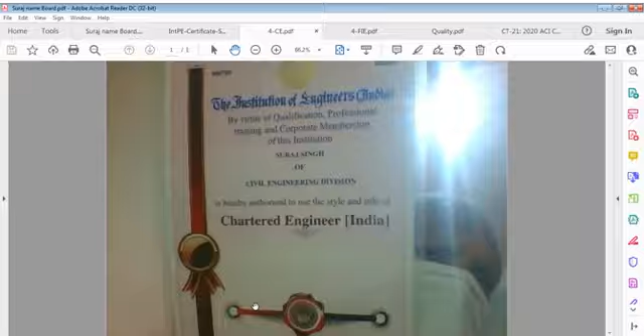in 1935 by King George V, under the law of our country at that time, which was ruled by the British. Under this charter, which is still in force under Constitutional Article 372 that allows continuation of existing laws, you may say this is an existing law, the Royal Charter of the Institution of Engineers India, Bharat, from 1935.

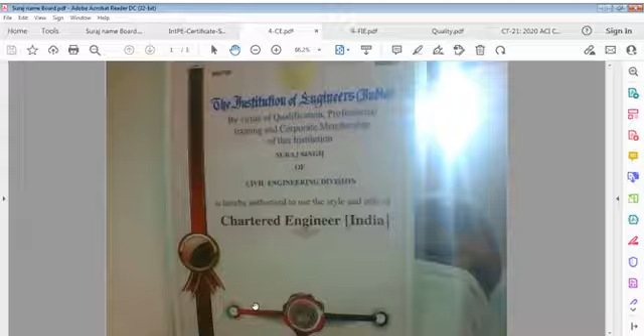Under this charter, the provision is that every corporate member on roll on that day, and for as long as that corporate member remains on the roll of the institution, has the privilege and right to be designated Chartered Engineer India.

This is one of three membership cadres: fellow is number one, member is number two, and associate member is number three. So, associate member, member, and fellow. I now belong to the category of fellow, the grade of fellow.

Then there is quality, which we have to talk of, and of course concrete, which for me is a very significant material that has got no limit. We shall talk about the details of this terminology

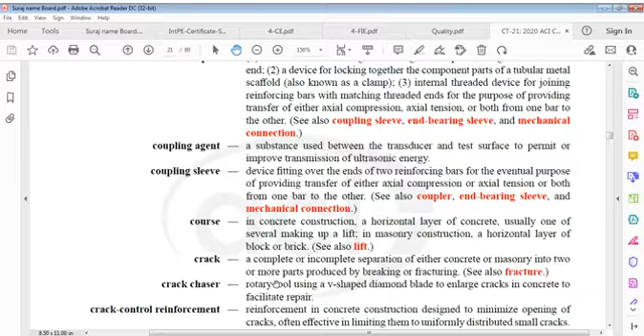I think it's page 20 or something, so we will talk of this after talking of quality.

So currently I come back to my files. You can see this page which gives me the opportunity to introduce myself as chartered engineer, as professional engineer, and also provides details of my email ID, that is suraj_engineer at yahoo.co.uk. I repeat: SURAJ, Suraj underscore ENGINEER, engineer, at yahoo dot co. You know that, it's no problem.

And of course, here is the certification. This is valid up to September 30th, 2025, and of course this is Chartered Engineer. So I close these certificates now, and let's talk on quality.

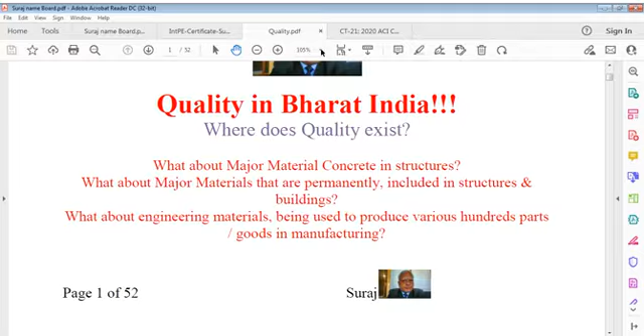My interest is in quality because for me, quality is a very significant part of life, and I'm interested here to deliberate on the status of quality in Bharat, India. Bharat, India means my birth country, the country where I originally belong. Bharat is its constitutional name, as well as India is also its constitutional name.

India we generally call in English, and Bharat we call in Hindi, though both are the same. In our constitution, the name given to this country is India, that is Bharat. It's written in Constitution Article 1. If you wish, you can open and see that, you can refer to it.

India, that is Bharat, or Bharat, that is India, you can say whatever way. It is called Republic of India and Bharat Ganrajya, Ganatantra Bharat. My question is, name is one part, constitution is another part, quality lies in a third part. We have quality in our constitution. We can say our constitution is unique. It's a mix-up, an abstract of many constitutions around the world.

It's not one, it's not two, I think there is no country or continent left out, while our father of constitution, Dr. Ambedkar, a brilliant one, highest qualified in law and in humanity, that scholar, that unique leader worked on this constitution, you can say worked on the birth of this constitution. We call it in Hindi Samvidhan, and he produced this document after having so much knowledge, spectrum of knowledge, and worldwide exposition, mastery in law, doctorate in law, whatever you can say, and law is only one field, I think he had knowledge about many other fields.

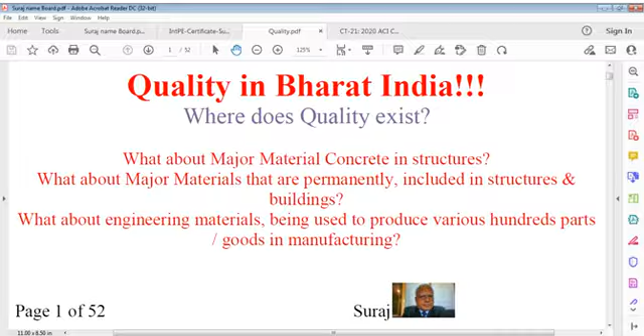We have to be very serious about this. That's why I raise many questions about quality. Questions are the same - who is responsible for what? This has to be defined.

We define job description in jobs - this is your job. Previously, it was not used to be defined, it was understood that if my position is this, my responsibilities are these. But now it's agreed - this is my job description, you have to do these jobs, and I think that is my right only. But that is only indicative. We have to be realistic.

It means I have to decide my job description myself, in addition to what has been demanded. It's up to me whether I go for vertical mobility or stay on flat, horizontal mobility. It's up to me.

But quality requires expertise in all specifications related to it. And when I say specifications, I mean particular requirements, not general ones. Every material, every product, every requirement, every action, every activity, every operation has certain criteria to be satisfied, and that criteria forces us what we have to do.

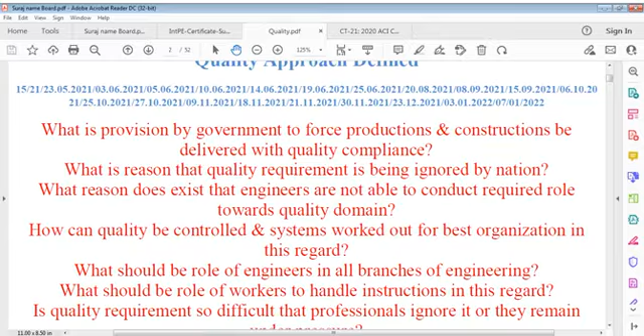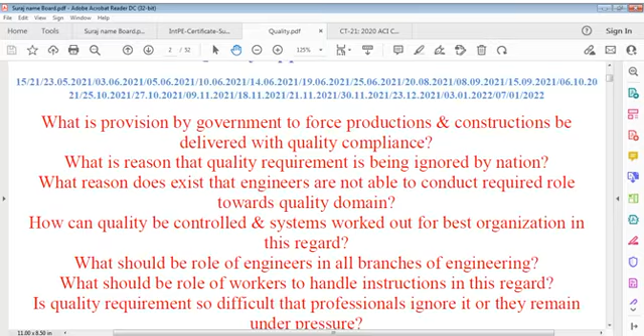So you can say it's a combination of various responsibilities from various roles, from various levels. You have to answer yourself these deliberations: what provision does government make to force productions and constructions to be delivered with quality compliance, and what's the reason that quality requirements being ignored by nation, and why are engineers not able to conduct required role towards quality domain.

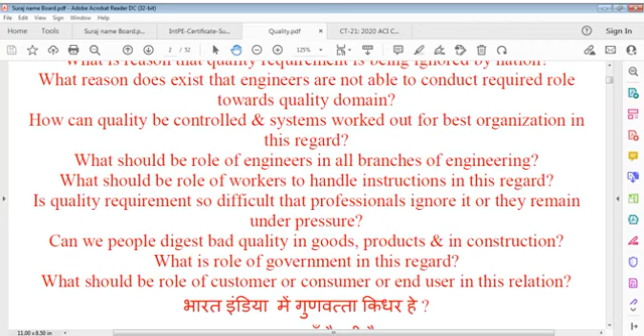How can quality be controlled and systems worked out for best organization in this regard? What should be the role of engineers in all branches of engineering? What should be the role of workers to handle instructions in this regard? Is quality requirement so difficult that professionals ignore it, or do they remain under pressure? Can people digest bad quality in goods, products, and construction? What's the role of government in this regard? What should be the role of customer, consumer, or end user in this relation?

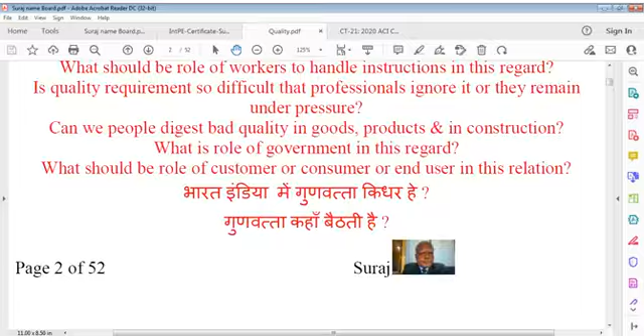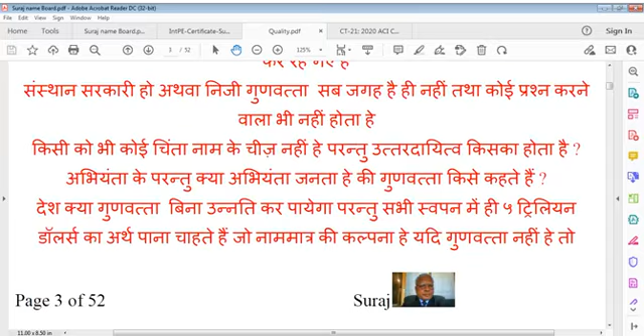There are so many questions that you can read in this Hindi script also if you wish to solve them, and we can see what there is which you have to find. All these are very, very important points. Quality is not just some coin you can just pick up and say this is quality. Quality is very important. I always say no seriousness exists.

No seriousness has been observed among engineers from all branches about quality requirement. They know what is required, but achieving it is the important point. I can say 90% or more of people are not serious. They know quality, they can do quality, but there's no reason what's happening. No material in market is available that can give quality performance, yet the quality mark is owned by material manufacturers. How is it possible? This means the quality certification is not perfect or it is ineffective, whether private sector or government sector.

There's no way of ensuring quality, and we have to be sure about this. I'm sure that engineers have forgotten quality, or they did not study it very well, or they do not want to update on this. Engineering is an updated strength. We cannot say that I learned something in my university, then I have to forget it. If you forget it, you are not an engineer.

You have to learn it. You have to read it again and again so that you remember it if it's not practiced enough in daily life. So quality improvement is something for the individual too. I can say every individual is important - engineer, non-engineer, worker, staff, or whosoever comes in your responsibility. Everybody has its responsibility, and that responsibility must be understood, must be charted out correctly. We have to find where weakness lies, where problems lie.

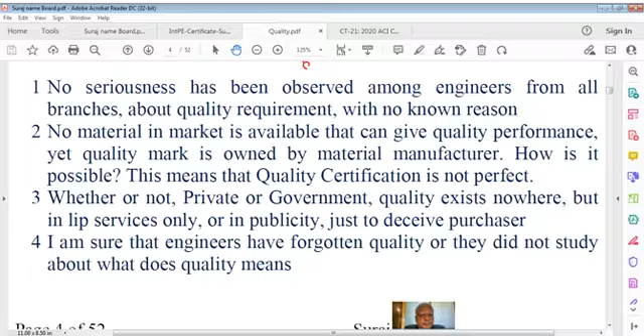So what I'm saying is concrete specification, as I was inclined to discuss about last time also, and I continued that one. This continuation of talk on quality is very important to remind you all the time that quality is quality. You cannot deny this fact. And all systems, what's happening there, this we know.

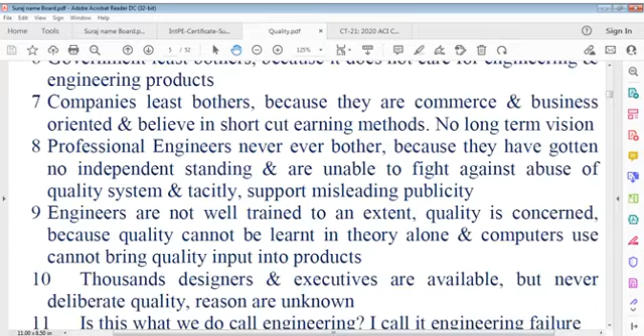The job of engineers - because engineers are involved in industry, and industry cannot move without engineers. That's also true. Engineering world is industry, engineering world is factory, engineering is design, engineering is construction. So you can say a major part of life is engineering. Even in defense forces, engineering is very important. Defense force can't work without that. Same way, whole society is based on engineering.

Millions and millions of workers work in industry, factory and construction. They're all engineering resources. We have to contemplate that way. It's not simply work knowledge, we have to study practical knowledge.

We have to study what's happening around the world, where you find problems. You can see traffic engineering, how to control traffic, how to move it, how to design a road system, or access. That quality of traffic movement is not impacted upon. That's an important point for you to see.

Even in your personal life, quality is very important. Sometimes when you walk, you feel, oh, it's a very bad surface I'm walking on. There's a little protrusion from the ground and your feet strike it, and you feel, what happened? Oh my God, this is there on the footpath and it stumbled me. It happens. So we have to see again and again.

My idea is, being an engineer, you have to be an engineer that brings back and reinstates what we have lost in quality. If you can't do that, if you are unable to do that, you're not successful in this way.

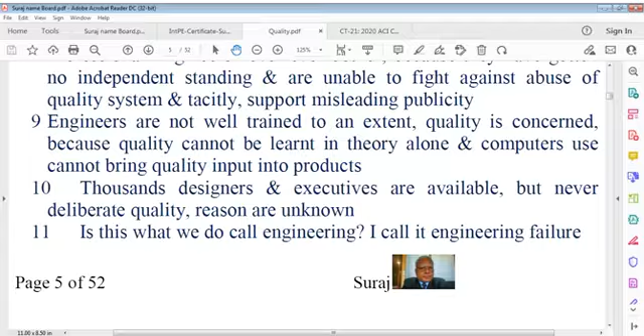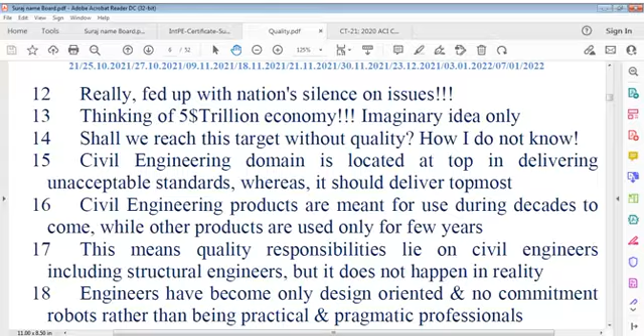What we call engineering - is this what we call engineering? I call it engineering failure. If you're not really fed up with the nation's silence on issues, and not only our nation's silence, many other nations' silence, really fed up, and we think of rising up and up, going to a level where we have this power of improvement of the nation, which can be called in economic terms, or knowledge area terms, or standards of representation.

And here is the point, which one is the root engineer, or supporting engineer, or being supported. When we say root engineer, it is the civil engineer who is interested in the root of life, all roots of life, from your smallest age to your top age.

Of course, continuation of behaviors is broken, continuity is broken, and we have to link again. Engineer is only that equipment, that media, which can ensure quality scenario. It should be self-oriented, self-motivated. Why should someone force me? When I'm an educated person, I should know what's my duty, what's my responsibility. Why should someone come and tell me to do it like this? I know what has to be done, and that point lies in your development. You can't always think somebody else would come, pay you, and do this for you. No, that's not going to work.

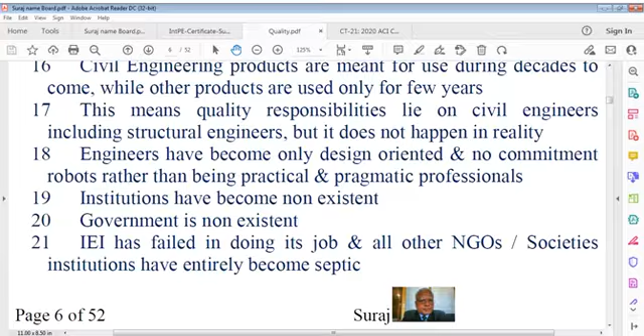Robots, rather than being practical and pragmatic professionals. Our practical aspect, our learning, has been discarded by those people who have strength, who have governance power. Because of that, quality is absent to that extent, I can say. If quality doesn't come back, it means the government is non-existent to that extent, because the government doesn't think in quality terms. If these are democratic governments, they won't think qualitatively. If there's a kingdom, I think there's some strict action, because a king doesn't require approval again and again through elections. And that's my point of concern.

It's not really that simple sometimes, we have to think differently. Engineers do not have communication and coordination skills, and that's a point of weakness. Coordination skills, communication skills — engineers do lack in, not all, but the majority of them. Of course, very senior people do communicate well, and that is based on life experience.

I can say struggle is very important in the life of not only the engineer but everyone. Struggle, I think, is a kind of quality. If you have struggled, your performance would be different, your personality would be different. You won't start originally from zero-one; you'll start elsewhere from some other coordinate combination.

So what I say is struggle is a part of life. Struggle, maybe it is difficult to digest, but struggle opens many ways of the mind. It opens many windows of walls without being opened. Your mind remains so active if you struggle again and again. That struggle is not because you have to lift some weight or walk a long distance — that struggle is an ordinary one. And if you have not struggled, and your kids have not struggled, then you are moving on the wrong path. You have not struggled, you are not struggling, but your children, they have to come up.

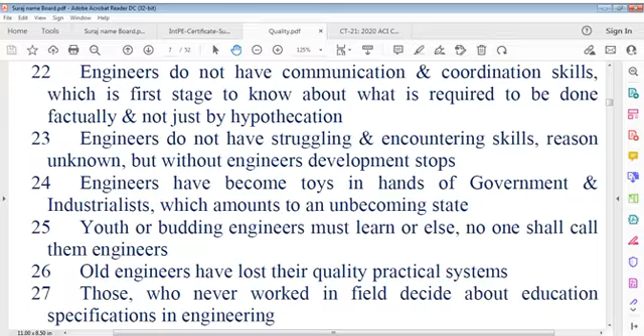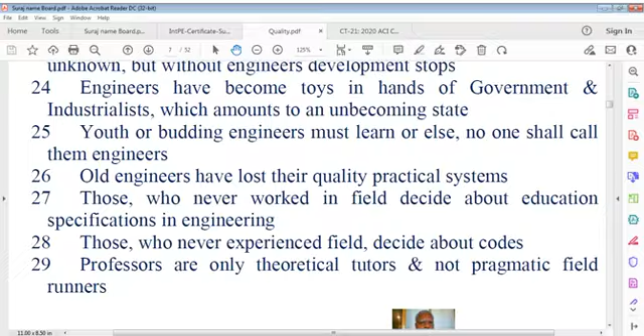Those who never worked in the field decide about education specifications in engineering, unfortunately. And those who never experienced the field decide about codes, and this also is unfortunate. How can someone decide about code when you don't have feedback from existing engineers in the field? So those professors who don't have any practical knowledge are involved in such a scenario. Just degrees are not adequate, even if one is a doctorate.

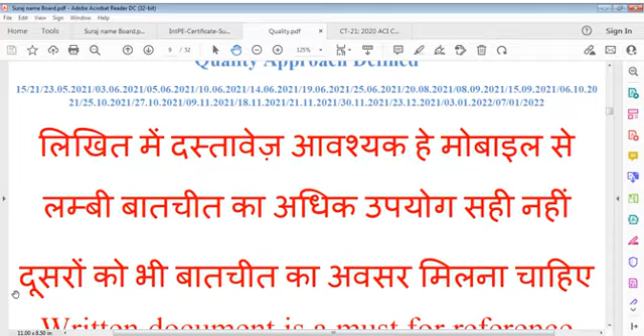Experience, and that too quality based, must be there. Think about quality always. Communication and coordination is a must, especially across significant disciplines and subjects. And written documentation is a must for reference.

So now it's about one hour on this talk. I'll go back to our file which I shared yesterday, and I'm going to share that again. It is concrete, concrete which is our life material. Concrete is my friend, I can say. Concrete is like my relative. If concrete performs correctly, performs rightly, then I should not worry.

There are rises and falls, sometimes it helps, but that's momentary. But when one is normal in health, one has to work. That's where the point is built up.

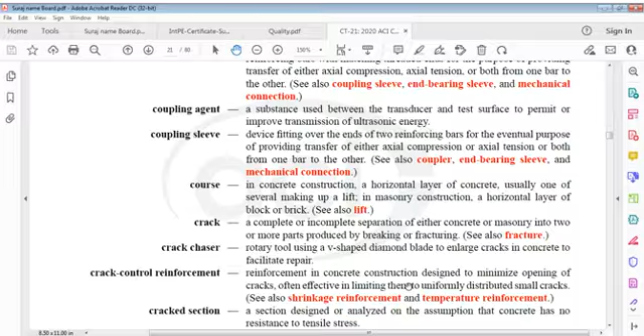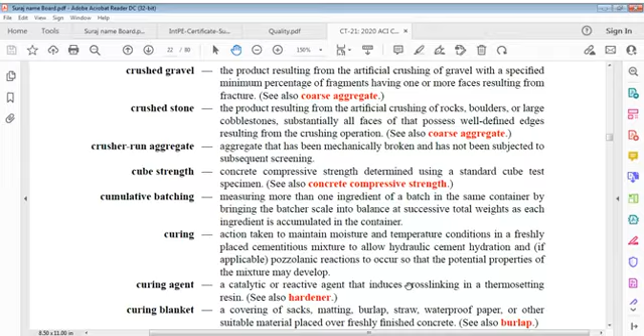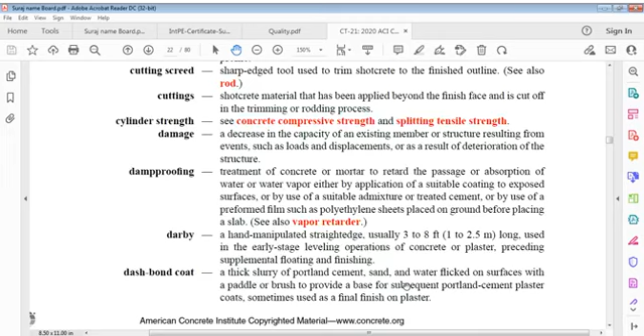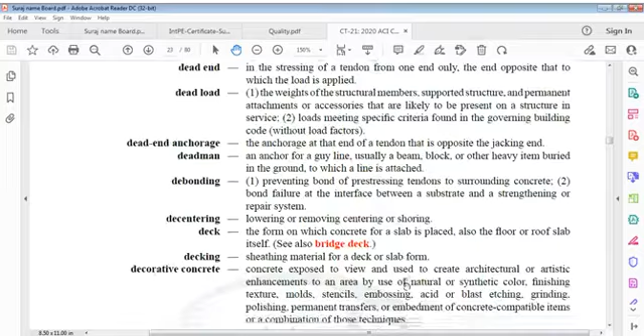Darby, yes we were in D, and we have gone through darby. We have gone through dash-bond coat. We covered darby, decracking, dead end, dead load, dead-end anchorage, debonding, decentering, decking, decorative concrete, deflection, deformation, deformed bars, deformed reinforcement, deformed tie bar.

So we go to this page 23, we will start now, and in between we will talk of quality also, because just keeping boring is not enough, we have to be very serious about that issue. What's happening in COVID-19, again and again explain, very very serious situation. And it happens because of somewhere lack of quality indirectly in life, and non-seriousness that exists among politicians to pass right information to people.

That's also one reason that we have lost quality. None trusts none, but everybody should trust everybody, it should be so, but here trust is absent.

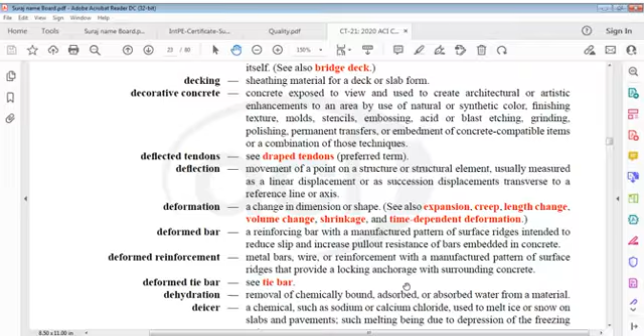So we have talked of decorative concrete, we have talked of deflection, deflected tendons, deflection, deformation. So we can say, what is deflected, what is deflection? We can define in terms of engineering. What is deflection? Deflection movement. Actually when I see it on a small page I cannot find it, so we can say deflection.

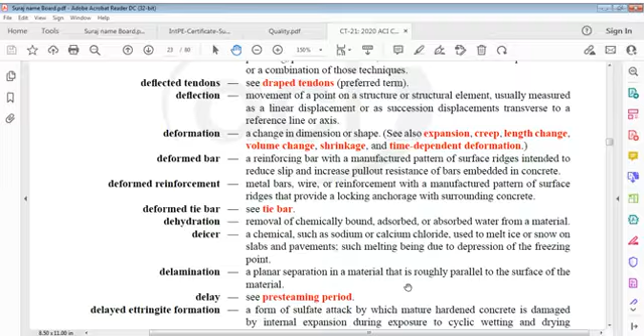Let me go to the main document, otherwise it's difficult for me to read. Deflection is the movement of a point on a structure. It's the movement of a point on a structure, of course the point moves, and that's called deflection. Vertical movement or horizontal movement, or movement at an angle as a resultant - that's what deflection is. Movement of a point on a structure or a structural element, usually measured as a linear displacement or a succession of displacements, transverse to a reference line or axis.

Deformation is a change in dimension or shape. We have to see other definitions also in this case, deformation relates to expansion, creep, length change, volume change, shrinkage, and time dependent deformation.

Now deformed bars is a very common term. We buy steel reinforcement, and generally it's not plain or mild, it is deformed bars. So we can say a reinforcing bar, or saria, lohe ka saria, is a reinforcing bar with a manufactured pattern of surface ridges, intended to reduce slip and increase pull-out resistance of bars.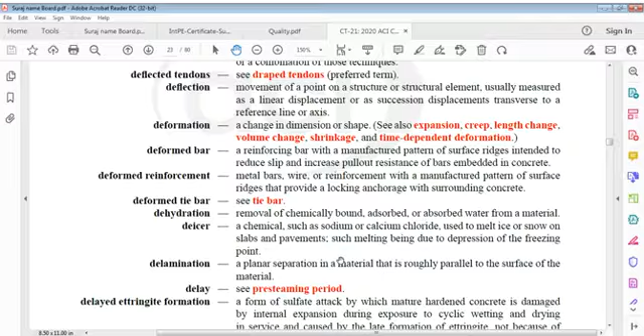Here is delamination, a planar separation in a material that is roughly parallel to the surface of material. Delamination is a planar separation in a material sheet or material that is roughly parallel to the surface of material.

Delay, we'll see presteaming period. Then delayed ettringite formation. Ettringite, a form of sulfate attack by which mature hardened concrete is damaged. Ettringite formation is a sulfate attack on concrete by which mature hardened concrete is damaged by internal expansion during exposure to cyclic wetting and drying.

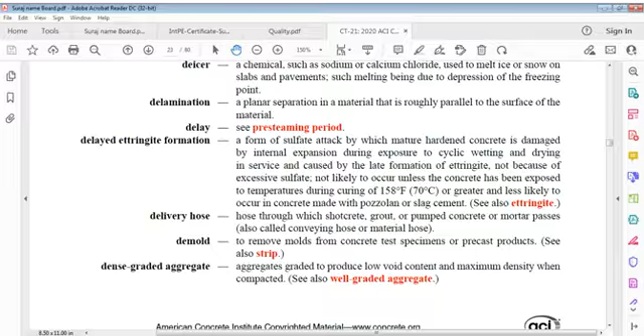Dense graded aggregate is graded to produce low void content and maximize density when compacted. That's what dense graded aggregate is.

Densifier is a combination of silicate and water based compounds that react on the surface of concrete to produce additional calcium silicate hydrate.

Silicates are combined with carrier compounds, most commonly sodium, potassium, or lithium based, to aid the process. This densifier involves a combination of silicate and water-based compounds that react on the surface of concrete to produce additional calcium silicate hydrate, CSH. Some products also contain siliconate.

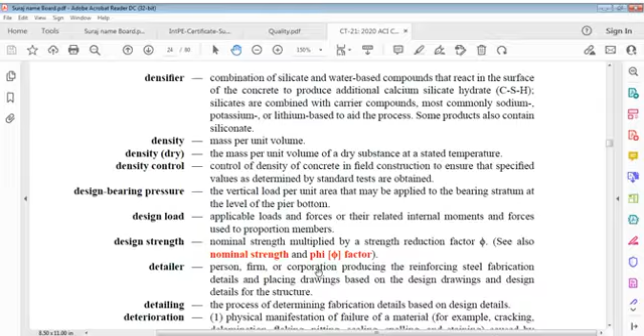Design load: applicable loads and forces, or their related internal moments and forces, used to proportion members. Design strength: nominal strength multiplied by the strength reduction factor phi.

Detailer: a person, firm, or corporation producing reinforcing steel fabrication details and placing drawings based on design drawings and design details for the structure. Detailing is the process of determining fabrication details based on design details.

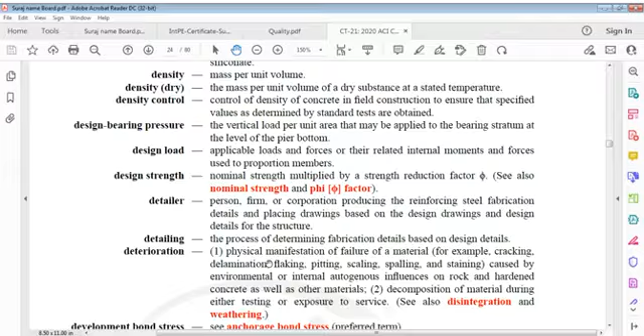Deterioration, as the term itself tells, is the physical manifestation of failure of material. Examples include cracking, delamination, flaking, pitting, scaling, spalling, and staining, all caused by environmental or internal autogenous influences on rock and hardened concrete, as well as other materials. It is the decomposition of material during either testing or exposure to service.

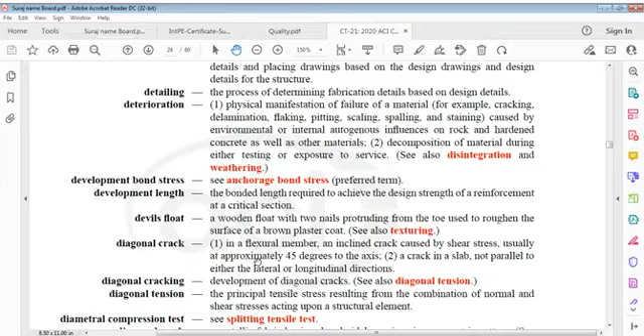Development bond stress, and we have development length: the bonded length required to achieve the desired strength, that is, the bonded length required to achieve the design strength of a reinforcement at a critical section.

Devil's float is a wooden float with two nails protruding from the toe, used to roughen the surface of a brown plaster coat.

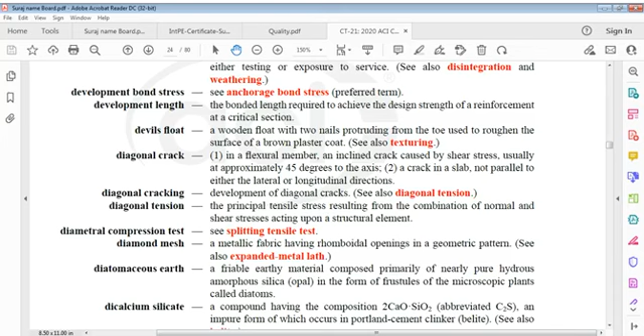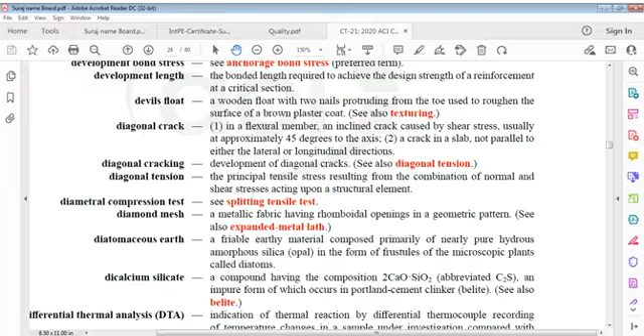Diagonal crack, a very common term: in a flexural member, that is a beam, an inclined crack caused by shear stress, usually at approximately 45 degrees to the axis. A crack in a slab not parallel to either the lateral or longitudinal direction. Diagonal cracking is the development of diagonal cracks.

Diagonal tension is the principal tensile stress resulting from the combination of normal and shear stress acting upon a structural element. Diametral compression test, that is the splitting tensile test. Diamond mesh: a metallic fabric having rhomboidal openings.

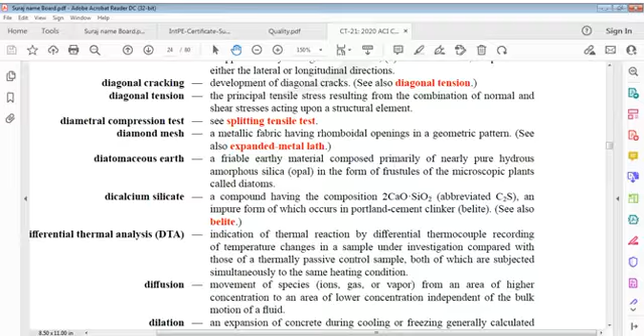Diatomaceous earth: a friable earthy material composed primarily of nearly pure hydrous amorphous silica, opal, in form of frustules of microscopic plants called diatoms.

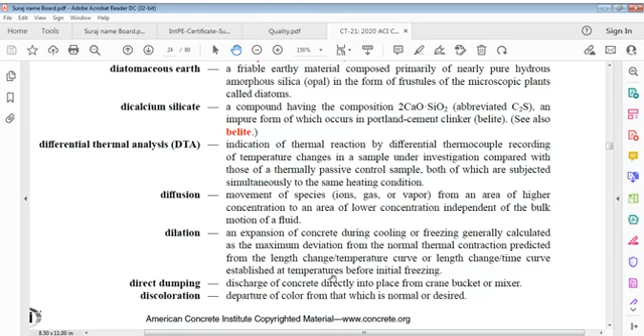Diffusion: movement of species, which are ions, gas or vapor, from an area of higher concentration to an area of lower concentration, independent of bulk motion of a fluid.

Diffusion we are defining: movement of species, these are ions, gas and vapor, from an area of higher concentration to an area of lower concentration, independent of bulk motion of a fluid.

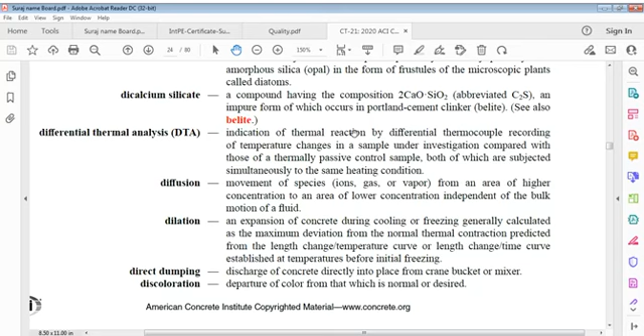Direct dumping: discharge of concrete directly into place from crane, bucket or mixer. Discoloration: departure of color from that which is normal or desired.

Disintegration, as the term itself says: reduction into small fragments and subsequently into particles, by deterioration and weathering.

Dispersing agent: a material capable of increasing fluidity of pastes, mortars or concrete, or in other terms, decrease of viscosity, by reduction of interparticle attraction.

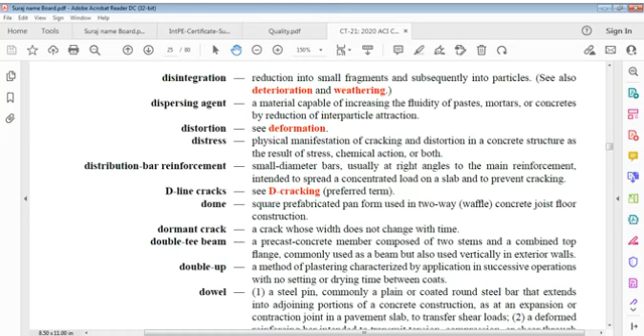Dormant crack: a crack whose width does not change with time.

Double-tee beam: a precast concrete member composed of two stems and a combined top flange, commonly used as a beam, but also used vertically in exterior walls.

Double up: method of plastering characterized by application in successive operations with no setting or drying time between coats.

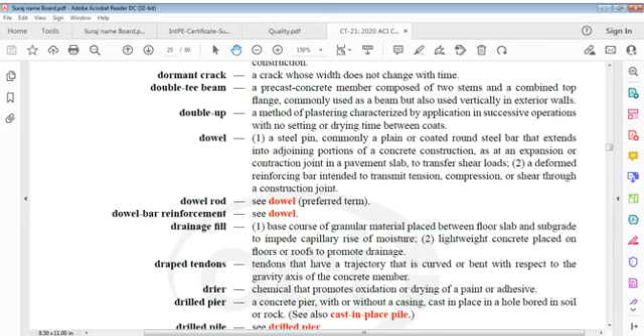Dowel bar reinforcement: a deformed reinforcing bar intended to transmit tension, compression, or shear strength. A steel pin, commonly a plain or coated round steel bar that extends into adjoining portion of concrete construction, as at an expansion or contraction joint in a pavement slab, to transfer shear loads. A deformed reinforcing bar intended to transmit tension, compression or shear load through a construction joint. Dowel rod and dowel reinforcement are the same, and next is drainage fill.

Drainage fill: base course of granular material placed between floor slab and subgrade to impede capillary rise of moisture. Also, lightweight concrete fill placed on floors and roofs to promote drainage.

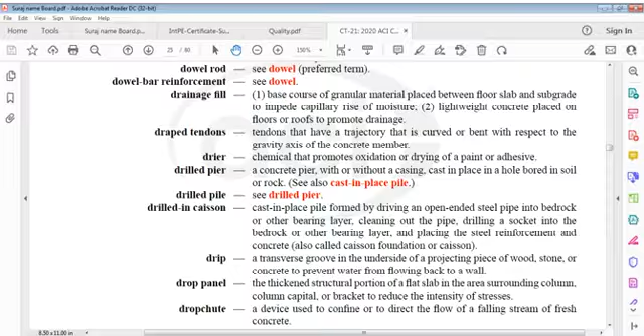Drilled pile, also called drilled-in caisson: a cast in place pile formed by driving an open-ended steel pipe into bedrock or other bearing layer.

Cleaning out the pipe, drilling a socket into bedrock or other bearing layer, and placing steel reinforcement and concrete, also called a caisson foundation or caisson. This is a cast in place pile formed by driving an open-ended steel pipe into bedrock or other bearing layer, then cleaning out the pipe, drilling a socket into bedrock or other bearing layer, and placing steel reinforcement and concrete.

Drip: a transverse groove in the underside of a projecting piece of wood, stone, or concrete, to prevent water from flowing back to the walls.

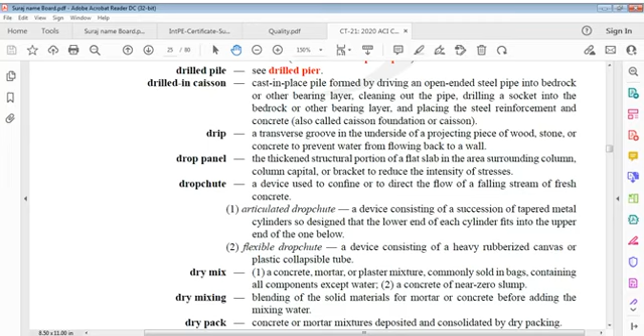Drop chute: a device used to confine or direct the flow of a falling stream of fresh concrete.

Here is the articulated drop chute, or flexible drop chute. Articulated drop chute is a device consisting of a succession of tapered metal cylinders, so designed that the lower end of each cylinder fits into the upper end of the one below.

Flexible drop chute: a device consisting of a heavy rubberized canvas or plastic collapsible tube. This is the flexible drop chute.

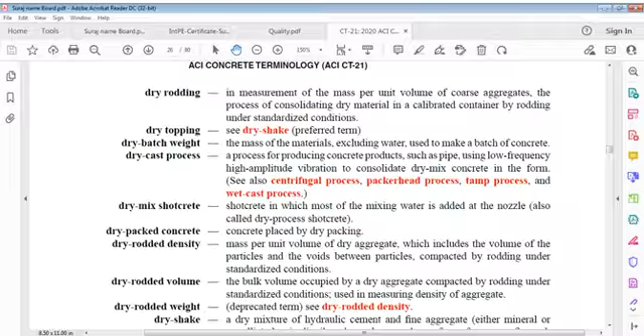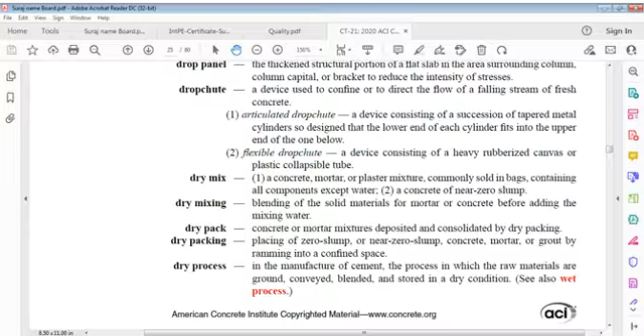Dry mix is concrete or mortar that has zero slump and is only dry without water. It's concrete or mortar or plaster mix, whatever, commonly sold in bags, containing all components except water. Dry mixing is the same - this is a blending of solid materials for mortar or concrete before adding mixing water.

Dry pack: concrete or mortar mixture deposited and consolidated by dry packing. Dry packing: placing of zero slump or near zero slump concrete, mortar or grout by ramming into a confined space.

Dry process, in the manufacture of cement: a process in which raw materials are ground, conveyed, blended, and stored in a dry condition. It's called the dry process.

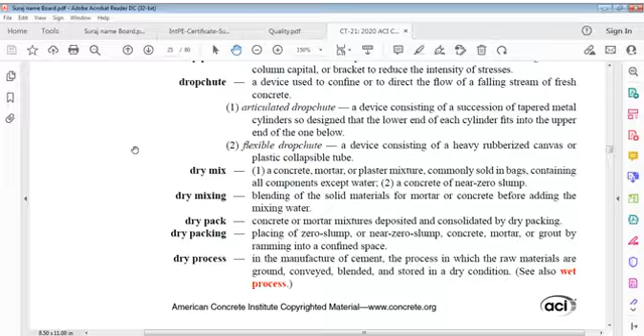Dry rodding: measurement of mass per unit volume of coarse aggregate.

Dry rodding is the process of consolidating dry material in a calibrated container by rodding under standardized conditions - it's measurement of mass per unit volume of coarse aggregate.

Dry batch weight: mass of materials excluding water used to make a batch of concrete.

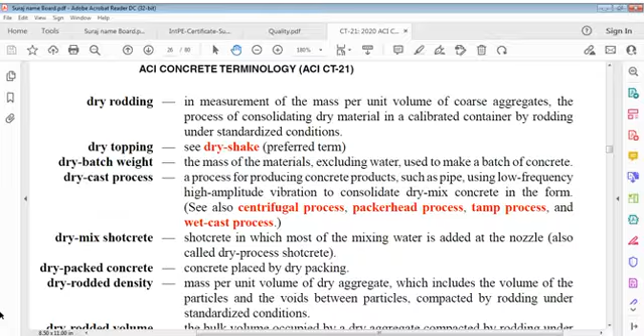Dry mix shotcrete: shotcrete in which most mixing water is added at the nozzle, also called dry process shotcrete.

This is dry mix shotcrete, in which most of the mixing water is added at the nozzle. Dry packed concrete is placed by dry packing.

Dry rodded density is the mass per unit volume of dry aggregate, which includes the volume of particles and voids between particles, compacted by rodding under standardized conditions.

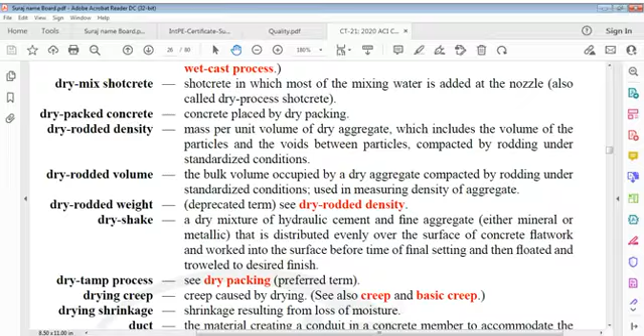Duct means material creating a conduit in a concrete member to accommodate pre-stressing steel in a post-tension tendon.

Ductility is the ratio of displacement at ultimate strength to displacement at which yield of flexural reinforcement occurs. That is two displacements: displacement at ultimate strength versus displacement at which yield of flexural reinforcement occurs. This ratio is ductility.

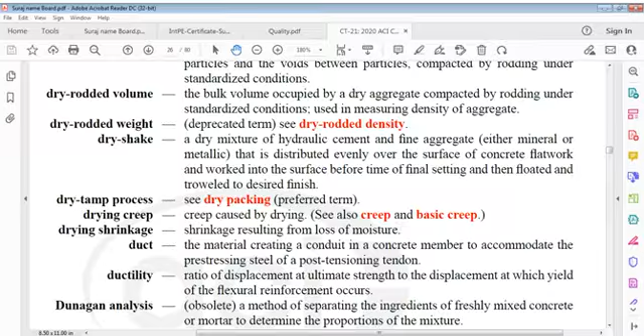Dunagan analysis, obsolete, now a method of separating ingredients of freshly mixed concrete or mortar in determining the proportion of the mixture. So this is Dunagan analysis.

What is durability? We talked about ductility, which is the ratio of displacement at ultimate strength to displacement at which yield of flexural reinforcement occurs, meaning the displacement where the flexural reinforcement yields. Ductility is a ratio of two displacements.

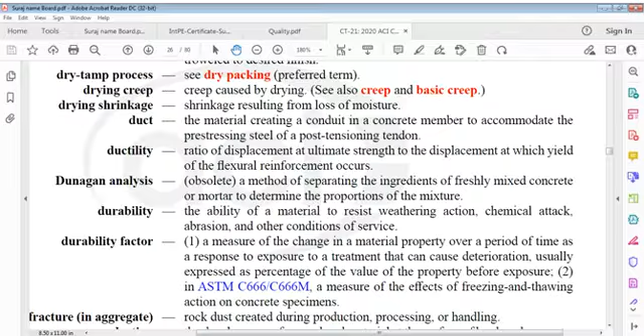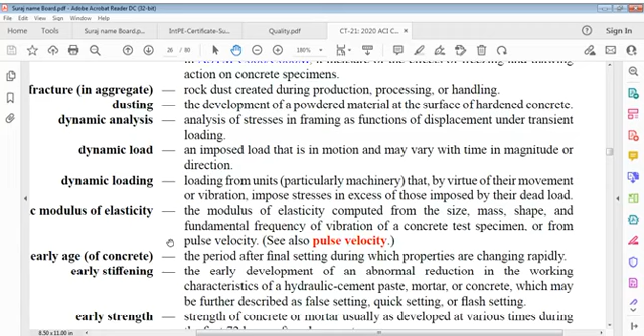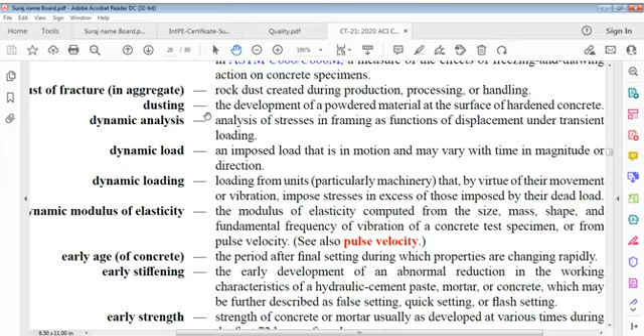Dust of fracture: rock dust created during production, processing, or handling. Dusting: development of powdered material at the surface of hardened concrete.

Dynamic analysis: analysis of stresses in framing as functions of displacement under transient loading.

Dynamic load: an imposed load that is in motion and may vary with time in magnitude or direction. Dynamic loading is loading from units, particularly machinery, that by virtue of their movement or vibration impose stresses in excess of those imposed by their dead load.

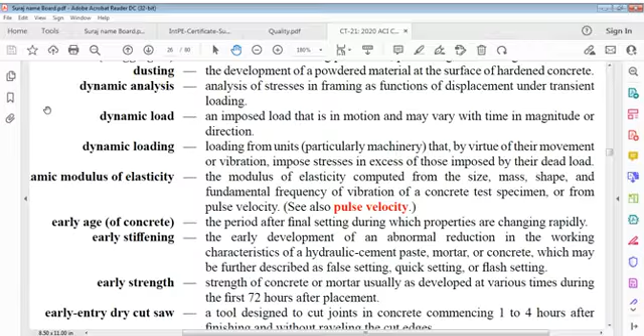Dynamic modulus of elasticity: modulus of elasticity computed from size, mass, shape, and fundamental frequency of vibration of a concrete test specimen, or from pulse velocity. Early age: the period after final setting during which properties are changing rapidly.

Early stiffening: early development of an abnormal reduction in working characteristics of hydraulic cement paste, mortar, or concrete, which may be further described as false setting, quick setting, or flash setting.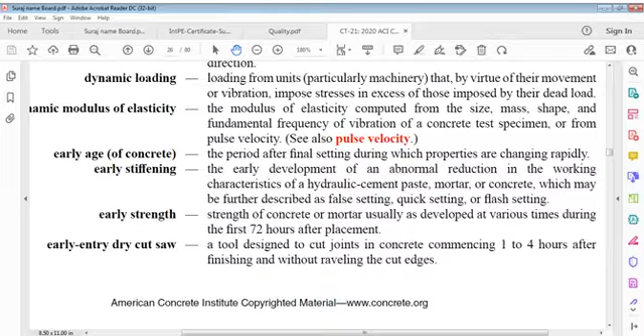Eccentric tendon: a pre-stressing tendon that follows a trajectory not coincident with the gravity axis of the concrete member.

Edge beam: a stiffening beam at the edge of a slab. Now we have edge form.

Edge form: formwork used to limit the horizontal spread of fresh concrete on surfaces such as pavements or floors. Edge reinforcement.

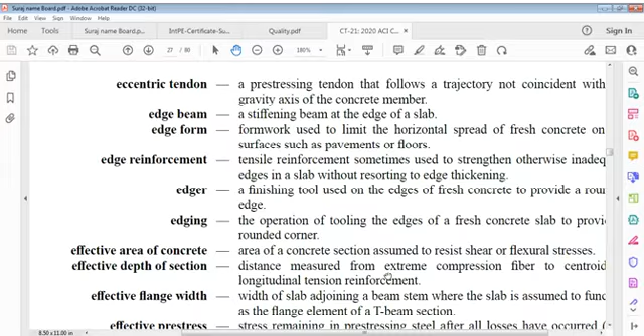Tensile reinforcement, sometimes used to strengthen otherwise inadequate edges, or edge thickening, in a slab without resorting to edge thickening.

Edger: a finishing tool used on edges of fresh concrete to provide a rounded edge. Edging: the operation of tooling edges of a fresh concrete slab to provide a rounded corner.

Edging is the operation of tooling edges of a fresh concrete slab to provide a rounded corner.

Effective area of concrete: area of concrete section assumed to resist shear or flexural stresses. Effective depth of section: distance measured from the extreme compression fiber to the centroid of longitudinal tension reinforcement.

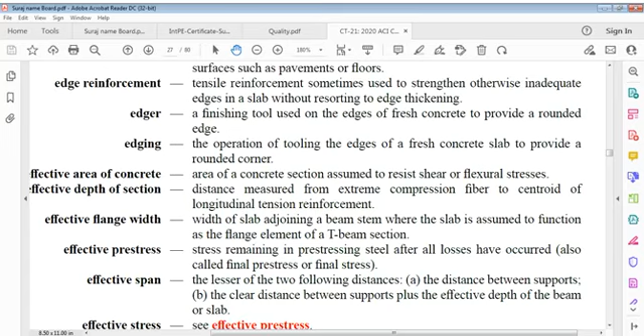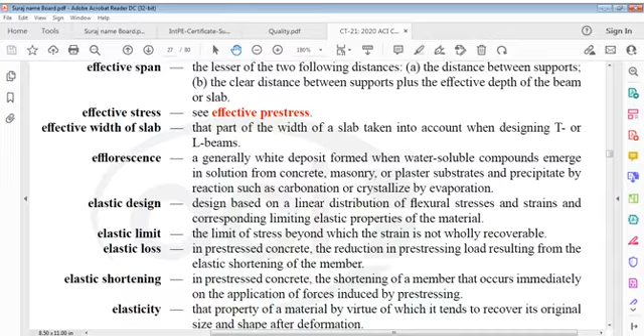Effective width of slab: part of the width of slab taken into account when designing T or L beams. And efflorescence is generally a white deposit formed when water soluble compounds emerge.

Efflorescence is generally a white deposit formed when water soluble compounds emerge in solution from concrete, masonry, or plaster substrates and are precipitated by reactions such as carbonation or crystallized by evaporation.

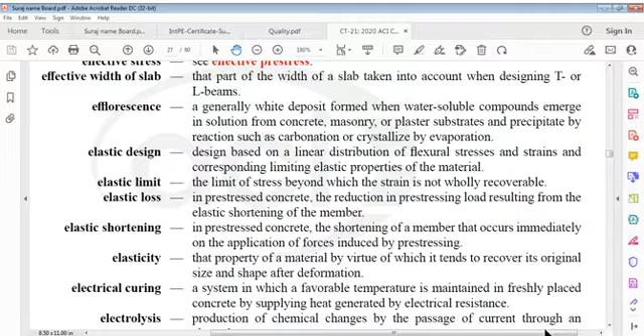Elastic loss, in pre-stressed concrete, is the reduction in pre-stressing load resulting from elastic shortening of the member.

Elastic shortening, in pre-stressed concrete, is the shortening of the member that occurs immediately on application of forces induced by pre-stressing.

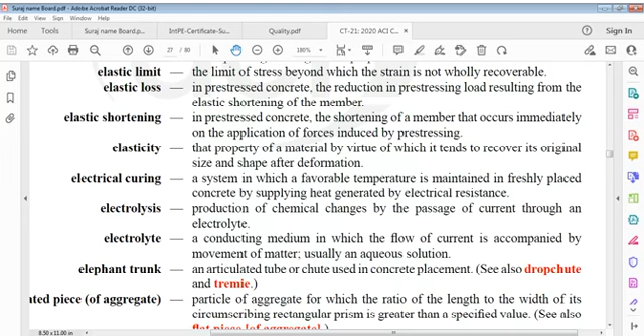Elasticity is the property of a material by virtue of which it tends to recover its original size and shape after deformation.

Electrical curing is a system in which a favorable temperature is maintained in freshly placed concrete by supplying heat generated by electrical resistance. Electrolysis is the production of chemical changes by the passage of current through an electrolyte.

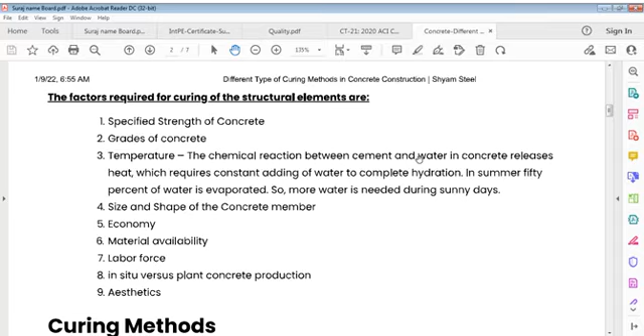Let me close this so you can see this file. It's available here, and it's a matter of the time we are spending on this. I can blow it up so you can see the different types of curing methods in concrete construction, the purpose of curing, and various factors involved - curing methods, water retention, temperature control methods, ponding, covering, all of this is there.

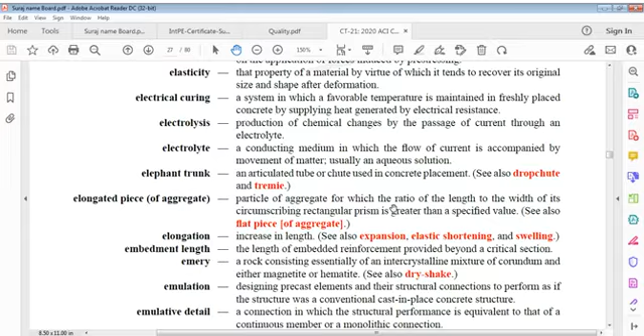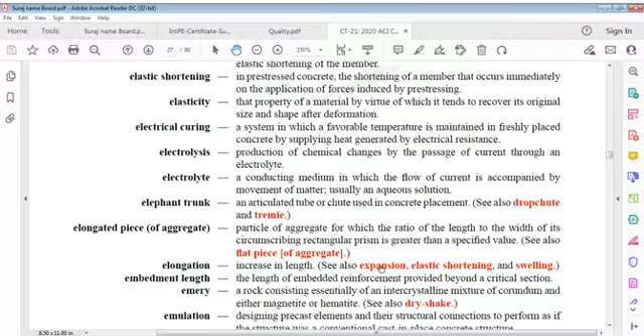Sorry gentlemen, I think we have nearly concluded this session. I was concentrating on curing, and it's very important. I was talking on electrical curing, and that is in fact very responsible. Electrical curing - it's a system in which favorable temperature is maintained in freshly placed concrete by supplying heat generated by electrical resistance. We will go further on this meanwhile.

I think we have gone where it's required professionally. Of course we are engineers, and we are people, and we have to understand these facts. Learning has no limit, and engineering means learning. Engineering cannot be defined as no learning, and without continuation of learning, engineering cannot be developed. Though people say it is site work, it is concrete work, it's curing work, it's very simple, it's conventional. Everybody says that, and some think this is not very important.

But I have to stress - if your construction is not excellent, if your construction is not qualitatively inclined, all your designs, the work done on designs, the excellence and highest degree of concentration applied on designs, then all go in vain - it only indicates that you have done something academically for academic interest and not for work interest. That's where I say my difference lies. And that's very important. With this, take note - thank you very much for today's talk. If everything is smooth and weather remains good, and I understand more and more, I like to share more and more with you people. Fine, thank you very much, gentlemen.